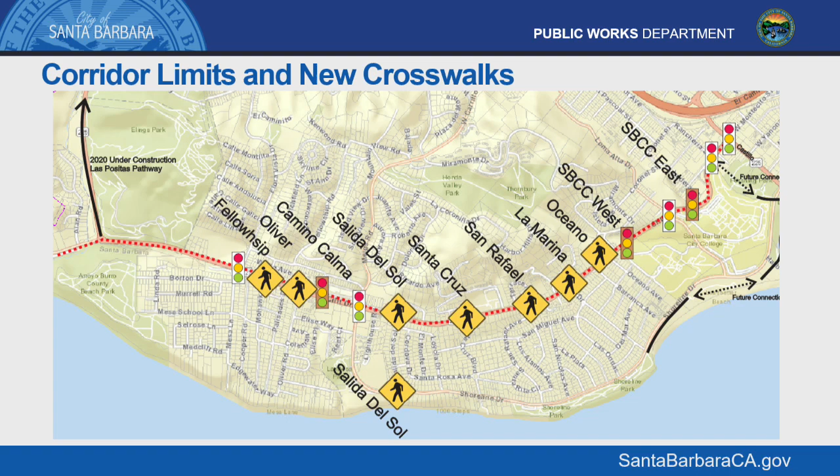We're planning, based on feedback from the neighborhood, for 7 new crosswalks and 3 new traffic signals on Cliff Drive, so there'll be a total of 10 better crossing locations than there are today. And we also heard that on Shoreline Drive at Salida del Sol, this is a location that the community would like a better crosswalk to get across the street. There's an entrance to the back of Washington School right up Salida del Sol from that location, and a better crosswalk at that location would provide better access between the neighborhood and La Mesa Park.

So some of the technical details that we've run into. The roundabouts are not feasible, and I'll show you some pictures and explain why. But this is kind of one of the first opportunities that we've had to say this in public, just that roundabouts are not feasible at the intersections we were studying. Therefore, we're concentrating on traffic signals at those intersections moving forward.

Two-way bike path that was strongly supported by the community. It does have some safety challenges that we're going to have to be very mindful of in the design. There's going to be some medians needed on Cliff Drive between Meigs and Camino Calma, and I'll talk more about that in the presentation. And as well, we're looking at raised crosswalks across the stop sign controlled crossings, and I'll show you why as well.

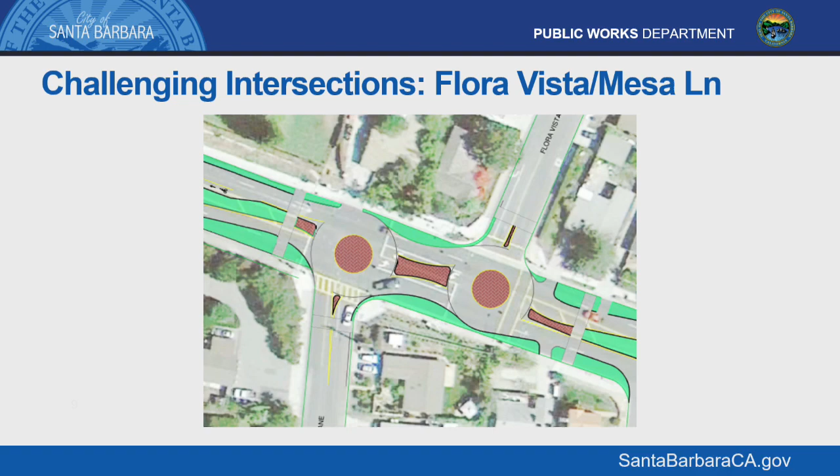But the drawback with going down to one lane with the way this intersection is configured is we're going to end up with 700-foot-long queues during the PM peak. And that's really a tough pill to swallow, and we don't think at the end of the day that that's going to be very well received by the community. So we are looking at maintaining the existing lane configuration going through this intersection. The consultant did sketch together a couple mini roundabouts configuration, but realistically this would probably be quite confusing for the public and wouldn't operate very well. So we quickly moved on from this idea.

Another challenging intersection is the driveway at Santa Barbara City College, the West Campus and Cliff Drive. Again, another intersection that we asked the traffic engineering consultant to study for a roundabout. There's basically two options, a roundabout or a traffic signal to improve operations at the intersection. We challenged the consultant to really reduce the footprint of the roundabout as much as possible so that it could fit. And they did that. Apologize for the graphic. The way they did this is they just laid tissue paper over top of an aerial and just began sketching.

But even with this reduced footprint roundabout, what we run into is, this is just the roadway edge, this doesn't even include the sidewalks, it starts to extend over into the southeast quadrant, and that's a creek habitat area, and the drop-off from the intersection is quite steep through there. So realistically, this just isn't feasible because of the topography in the area.

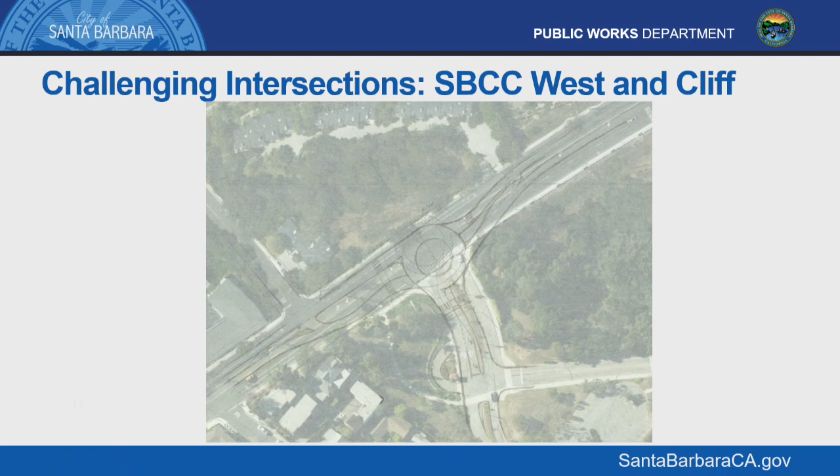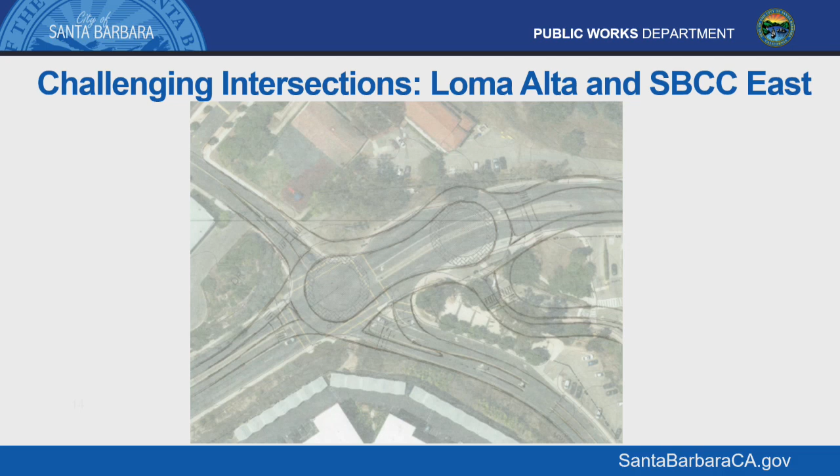So given the likely expense with an intersection like this and the limited benefits, we quickly discarded this as well. So all of the locations now, we're focusing on traffic signals instead of roundabouts. So based on all the public feedback and the results of the studies that were done for the roundabouts, we put some sketches together that was our best effort to reflect what the community had told us.

And last Thursday, we had a meeting at Monroe Elementary. We pasted all of the sheets together from one end of the multipurpose room to the other, and we just had people go around and look at it and give us their comments. We had some really great feedback. We had a really good turnout. Generally, there was a lot of support for the project. I'm going to walk you through the sections of the corridor and just share with you what we heard.

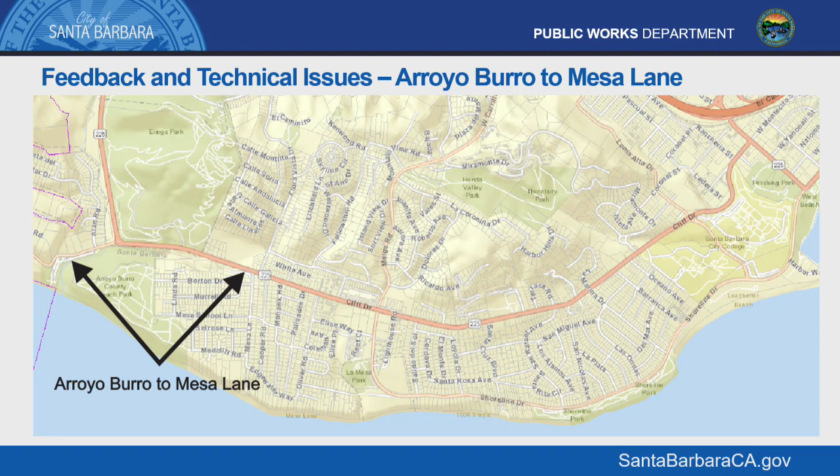I'm going to start at the western end between Arroyo Burro County Park, Hendry's Beach, to Mesa Lane. So this is probably the most straightforward section of the project. The roundabout, gosh, my cursor is not working very well. We're envisioning the path will run along the south side of Cliff Drive, past the roundabout. The roundabout was built to accommodate this. We were thinking ahead to this in the future.

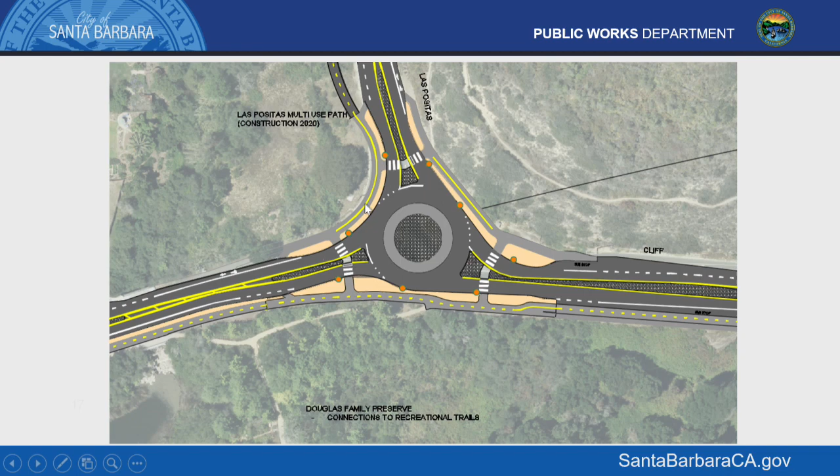This will be a location where the path that goes up Las Positas, shown here at the top of the screen, will tie into the path. So pedestrians and cyclists will just use the crosswalks going around the roundabout to get from one pathway to the other.

Starting to go up the hill, this is where the Elings Park entrance is off of Cliff Drive. This is a location we did get some feedback. People are wondering, how would I get from the path to the Elings Park entrance? We really don't have a good answer yet. It is an awkward place to cross the road. The road's curving, it's downhill, so speeds are high. We do expect speeds will come down somewhat once we go down to one lane in this section.

We are planning both a bike path and on-street bike lanes. The bike lanes will double as a shoulder, an important shoulder for safety and maneuverability for traffic as well. But we don't expect that the higher speed cyclists are going to want to use the bike path and mix with the slower speed users. So especially going up and down the hill here, providing them with a shoulder area that they can use of their own will be important.

We did get a question on whether or not parking could be added to this section of Cliff Drive. We did get some feedback that some of the neighbors in the Allen Road neighborhood would like some parking removed in that neighborhood and moved on to Cliff Drive instead as a way to maintain coastal access. Upon looking closer at it, there just doesn't appear to be enough room here, and there's probably some downsides to having parking on Cliff Drive as well.

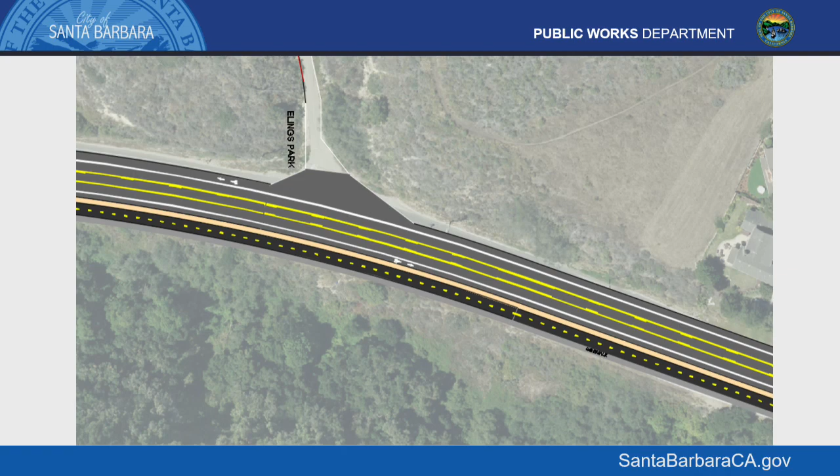So just summarizing this segment, we got feedback that we should add crosswalk flashers at Alan Road. Very reasonable request, and we're going to incorporate that into the plan. I brought up the parking on Cliff east of the roundabout.

There were some questions about whether or not we should have trees and that median separation between the bike path and Cliff Drive. That's something that once we move into the design phase and we have a landscape architect on board and the project is being reviewed by the Architectural Board of Review, that'll get sorted out. And people are concerned about traffic speeds. And that's a common theme throughout the corridor, traffic speeds.

Mesa Lane to Mohawk, so this is that intersection at Mesa Lane and Flora Vista. And as I mentioned, the challenge with going down to one lane through this intersection is going to be queuing, and we expect 700-foot-long queues will happen during the PM peak if we go down to one lane. The trade-off is that we are going to lose a few parking spaces by maintaining two lanes in between Cooper and Mohawk, which is in this area in the bottom right-hand side of the screen.

We did get some comments from the public that they would prefer to see those parking spaces maintained, and that would mean going down to one lane, and the trade-off would be the really long queues. So that's something we're wrestling with right now. It would be our recommendation to go with this type of traffic configuration, but that's a detail that can be worked out during design as to whether or not we maintain parking or go down to one lane, but it is a pretty significant sacrifice in capacity at the intersection.

What we heard about this intersection, that it's confusing, so there are some things that we can do to make it more obvious. There are some things that we can do to make it safer as well, and we will incorporate that into the project. Talked about the loss of parking and how some residents would prefer us go down to one lane in each direction. And the center turn lane that would be incorporated into the project was strongly supported.

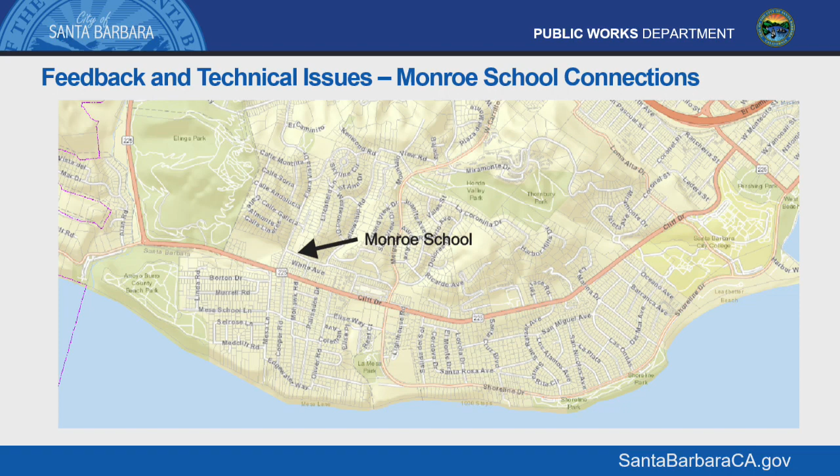We did have some options for connections to Monroe School. At the public meeting that we had in the summer that we attended at the Mesa, there were some questions about, well, how are we going to get from Monroe School to the path? And so we took a closer look at that. Apologize for the scale here, but this is Flora Vista. This is the main entrance to Monroe School.

So our idea is to widen the sidewalk along the east side of Monroe. Currently, Flora Vista is about 40 feet wide. It's about 4 feet wider than a standard city street, so we could pretty easily widen that sidewalk from 5 to 9 feet and still have a standard width city street. We could even plant some trees in the parking aisle to provide some separation between the sidewalk and moving traffic, and that was pretty well supported.

Also supported was some curb extensions at the Red Rose and Flora Vista intersection. We heard a lot of comments from people that drivers come flying down the hill on Flora Vista and the stop sign compliance isn't very good, so that would help. And then the other thing that we are proposing is to do some sidewalk infill on Red Rose between Fellowship and almost all the way to Flora Vista. There's only about 100 feet of sidewalk and then it just ends.

These homes, they all face into the cul-de-sac, and this curb that's along the south side of Red Rose, once you're beyond that curb, it just drops down into people's backyards pretty rapidly. So we would actually have to build the sidewalk within the existing roadway footprint. But again, this is a 40-foot wide road. We could build a narrow 5-foot wide sidewalk, maintain parking on both sides, which we heard overflow parking for the school, especially during school events, is important here. This got good feedback too, but maintaining parking was something important to folks in this section.

Between Mohawk and Lighthouse, this is getting to the section near the shopping center. This is at Oliver, and this is a standard intersection configuration that we're planning. Due to some of the safety issues associated with a two-way bike path, we are recommending that if the project moves forward, that we include raised crosswalks at the intersections. And that's going to be important to improve visibility of cyclists and pedestrians, but also to slow drivers down as they're going across the path.

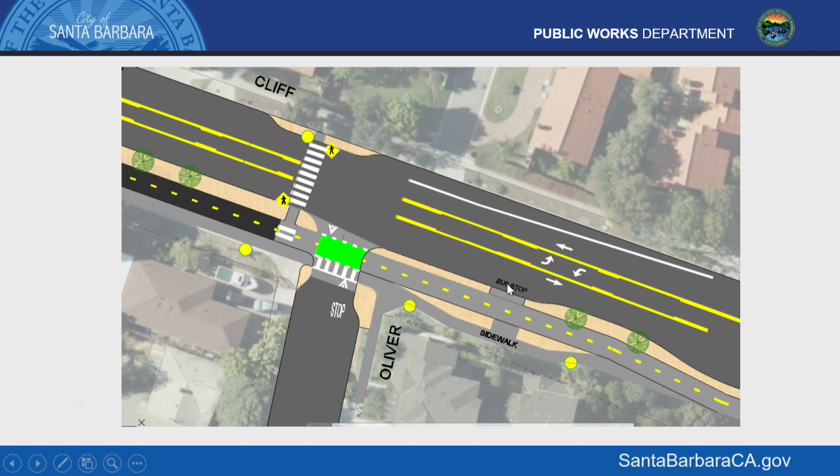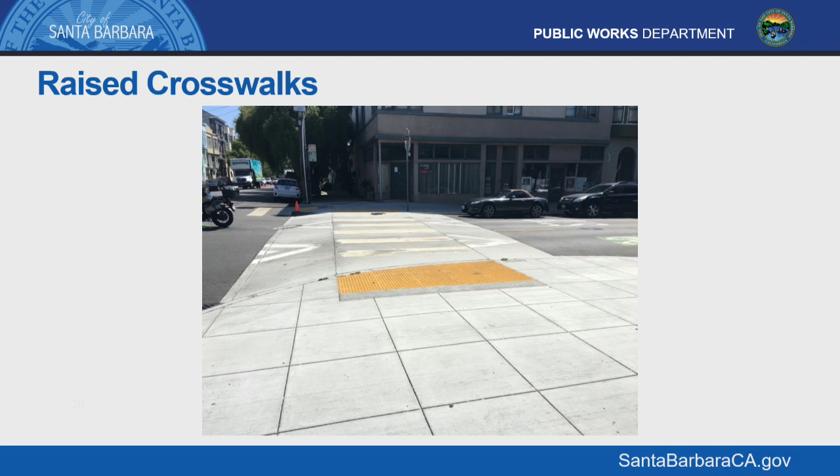This shows a new crosswalk at Oliver, which was strongly supported. And as well, this shows a bus pocket. And this is pretty typical of our concept designs along the corridor, having crosswalks near bus stops. This is an example of a raised crosswalk. This is a pedestrian-only raised crosswalk. This is an example likely of what our project would look like. So this shows a slight raise as the bike path goes through the intersection. Of course, it's got the green highlights to improve visibility.

This section here in front of the shopping center, we got the most feedback for this section, and this is probably the most complicated section within the project. This section between Camino Calma, which is the intersection on the left-hand side of the screen, and Meigs, which is the intersection on the right-hand side of the screen, currently has the highest concentration of collisions in the corridor. So we've already got safety issues going on in this section, and we need to be very sensitive about introducing a bike path, because we could be introducing some new safety problems.

So we need to take steps to correct the existing safety problems and protect users that are going to be on the bike path. In looking at the collision pattern, a lot of the collisions are involving drivers pulling out of private driveways trying to turn left. And just thinking about introducing a bike path into the mix and potential users of that bike path, eliminating those left turns from the private drives is really something that we need to do to protect users of the path and to get rid of that existing collision pattern, just to make the whole area safer. We do that by building medians down the middle of this section.

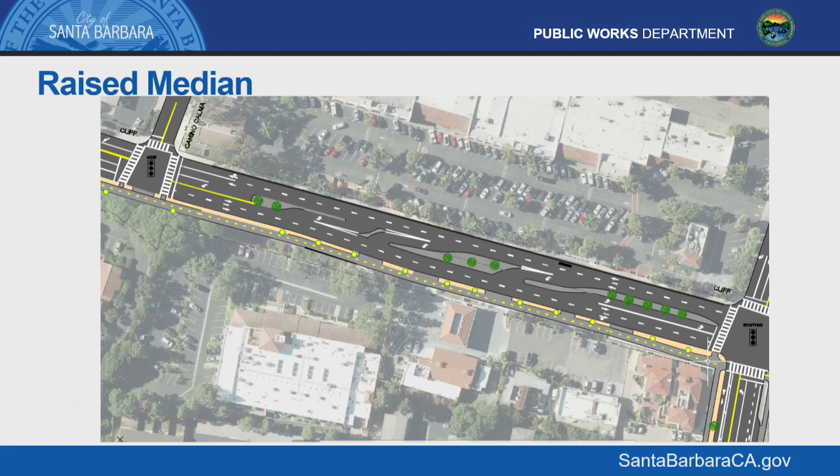There would be opportunities to turn left into businesses, but leaving businesses, they would have to go down to the next intersection. And for example, with the shopping center, they could exit onto Camino Calma and turn left at a new traffic signal. Or if they're along the south side, they could turn right and make a U-turn at the intersection. So that is a pretty big change. We did get a lot of comments and concerns about that, but it's really an essential feature to this project. And if we can't make this section safe, we don't have a project. We can't move forward. So we hear the concerns, and that's the trade-off, is in order to move forward with this project, we need to do something about the safety issues here.

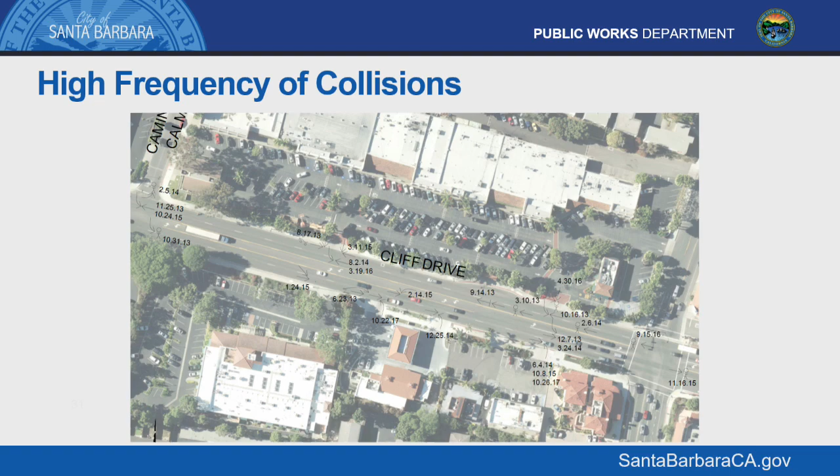Oh, this didn't show up very well. This is an aerial diagram that shows the existing collisions that are happening over a recent 5-year period out there. And what this is trying to illustrate is all of the collisions, and many of them are involving people trying to turn left from the private driveways. And it is a busy area, so it stands to reason that when you're trying to turn left into a busy street, that there are going to be collisions. And in fact, that is showing up.

So just summarizing again what we heard, most comments were in this section, concerns about the medians. We did get just a general comment that there needs to be more bike parking in the area with the shopping center, and certainly if we were to build a bike path, which we would expect to be very successful, the need for bike parking would increase. And there was support for a new traffic signal at Camino Calma at the western end of the shopping center.

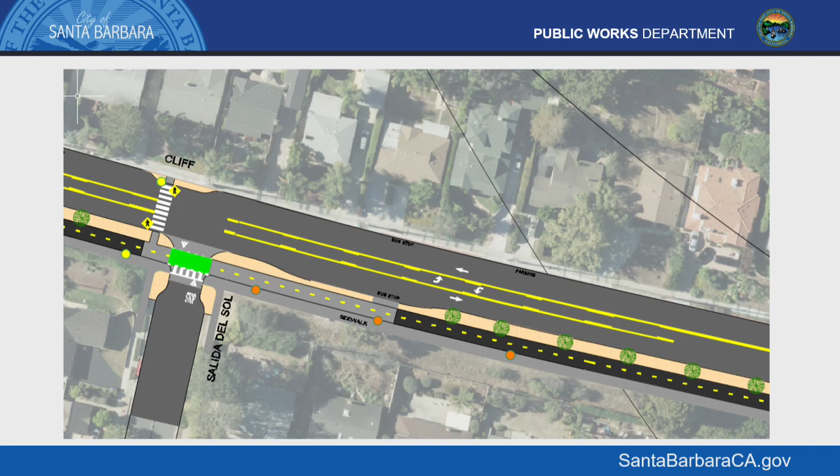What we don't want to have happen is somebody trying to turn left from one of the side streets, waiting, and somebody passing them on the right. And we all do it, rolling through stop signs. We try not to. But if somebody's trying to turn left and somebody were to roll through a stop sign as a pathway user, going through the intersection, that would be a really bad mix. So again, this is another essential feature of the project for safety, but there were comments about that.

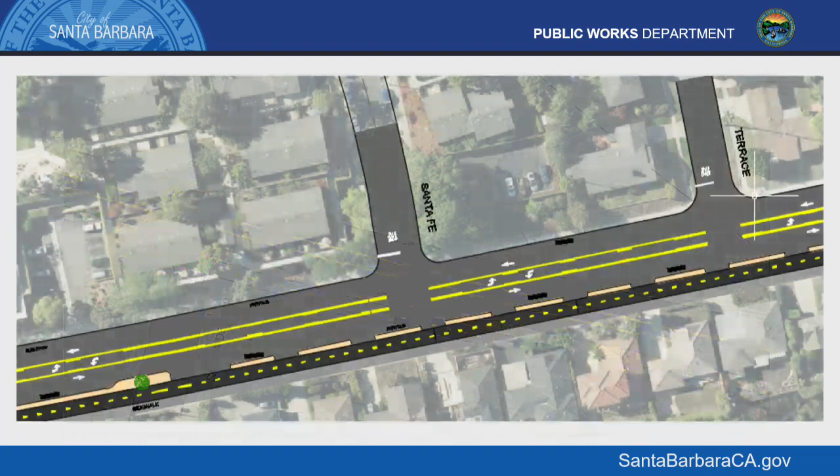Oceano to the Santa Barbara City College East Campus. So this is Oceano here. A new crosswalk proposed, was very well supported. The pathway along this section would be up at sidewalk level, so it would be combined with the sidewalk, be really generously wide. We could probably have about a 15 to 16 foot wide pathway through this section. Lighting is probably extra important in this section, given students and evening classes, just to make them feel comfortable. And a new traffic signal at the City College East Campus driveway.

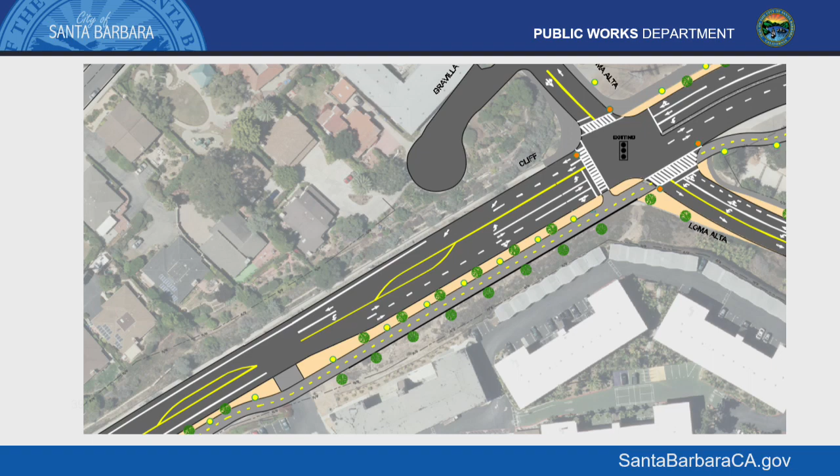This is the Loma Alta intersection, the existing traffic signal. This section is where we have to open back up to 2 lanes in each direction just for traffic capacity reasons. Because we need to maintain most of the width on Cliff Drive, we would have to get into the berm that's along the south side of the road. But the city does have plenty of right-of-way along there. We could build a really wide parkway. We could have trees straddling the pathway. Again, it could be wide, 14 feet. So this could be a really great place to walk and bike along.

And this is, again, Loma Alta and the City College East Campus driveway where there would be a new traffic signal. Some changes here. One of the things that we heard from City College is the existing bus stop. There's a bus pullout westbound Cliff Drive just before the intersection. When students get off the bus, they come across the intersection. There's quite a mass of them. And what they do is they enter the college campus and they walk down the driveway in front of the admin building. City College staff, they're quite concerned about the safety of their students.

It is a busy driveway, so there's quite a mix of deliveries, access to one of their main parking areas, and introducing pedestrians into that area. They do have some concerns. They would prefer students to be over here on the right-hand side of the screen, which guides pedestrians more into the main entrances where the classrooms are. So the concept would be to actually eliminate the crosswalk on this side, move the bus stop closer to that new traffic signal at the East Campus driveway, and have the crosswalk here.

They would cross and they would enter the college campus closer to where City College is trying to get people to walk. In that space where the bus pocket was, we could fill it in, landscape it, trees. We could widen the sidewalk for a few hundred feet up to McKinley School, which would create a better walking environment from the Lower West neighborhood to McKinley School.

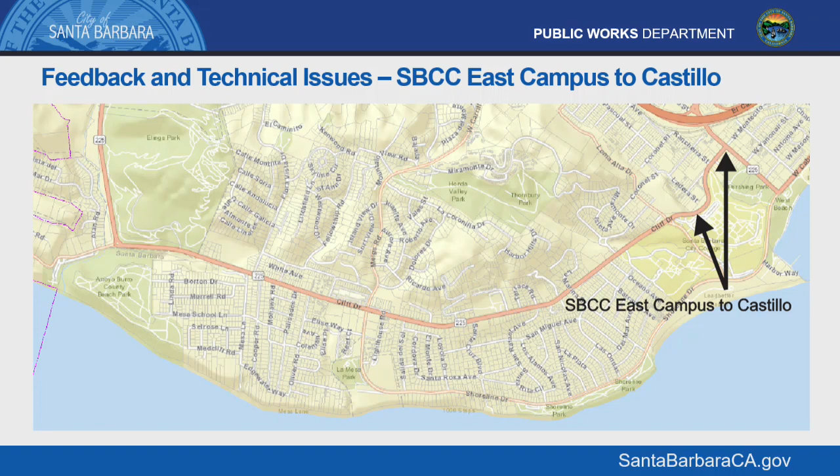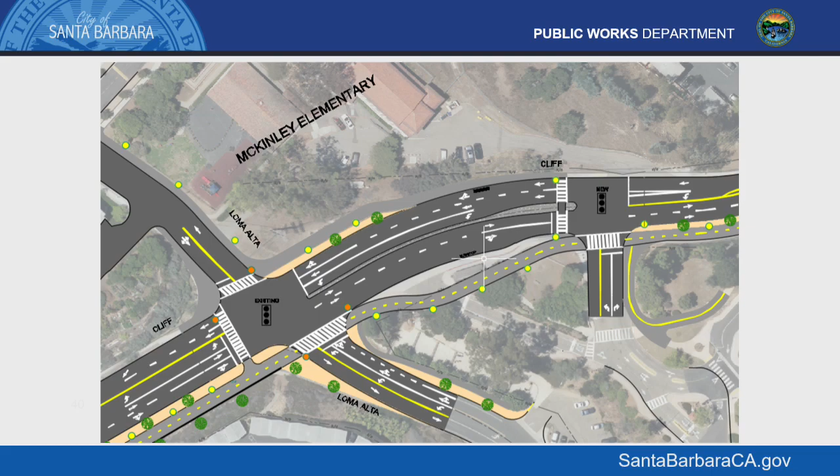Chair, could I ask a question? Yes. On those lights, that sort of double at Loma Alta and at the entrance, correct me if I'm wrong, but those will be together, they'll cycle together, is that right? Committee Member Lackerby, yes.

Given the really tight spacing of these two intersections, there'd have to be really good coordination between them. So if a driver on Cliff Drive drives through the first intersection, we'd want them to clear the second intersection. We would run into red light running problems if we didn't provide for that. So that'll be an essential feature, good coordination between those two traffic signals.

And finally, the final section, the East Campus driveway to Castillo Street. So this is what we call the viaduct section. Along the north side of Cliff Drive right here, that's the giant retaining wall, and the Lower West neighborhood sits at a lower elevation. We would have to go down to one lane going uphill. We would maintain 2 lanes going downhill. That would be important for capacity.

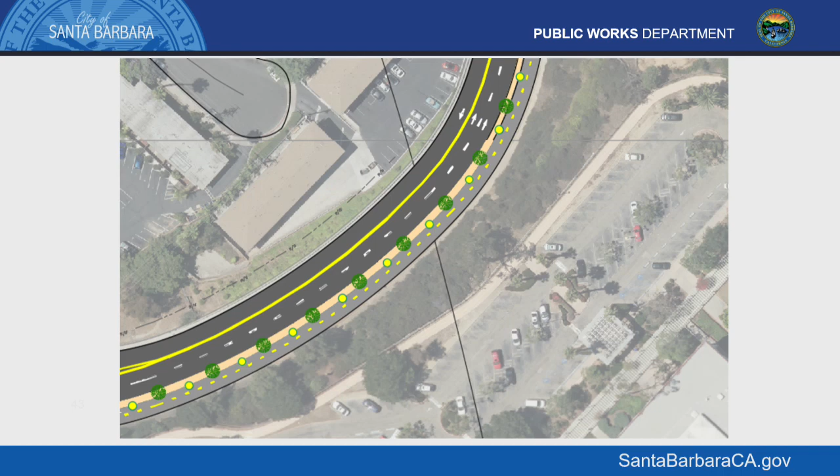This eastbound movement going towards Castillo Street gets quite busy during the PM peak, and just for stacking reasons alone, we would need to maintain the 2 lanes. But by going down to 1 lane uphill, that would provide us with enough room to widen the pathway to, I think, about 14 feet and provide a parkway for some separation. It seems like lighting would be a good feature in this section as well.

This is the Rancheria intersection, so this would provide a connection point from the pathway to the new bike lanes that were recently installed on Rancheria. And this is the section approaching Castillo Street. We would have to maintain the existing number of traffic lanes in this area just due to capacity reasons. But all the lanes that are out there right now are quite wide. They were built to Caltrans standards many years ago.

We think we can gain about 8 feet of street width, so we could widen the sidewalk and provide a small parkway in this area by adding 8 feet to the existing sidewalk. The path would end at Castillo Street. At this location, we envision short-term there being a left turn staging bike box so that cyclists could go up Castillo Street. A little bit longer term, we do have a funded project through the Measure A program to study Castillo Street and improve the connection between Haley through this area. So we do anticipate future improvements will tie into this.

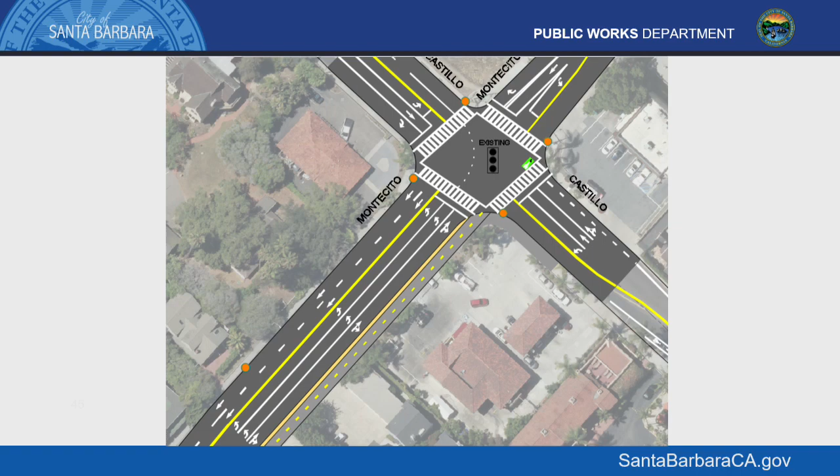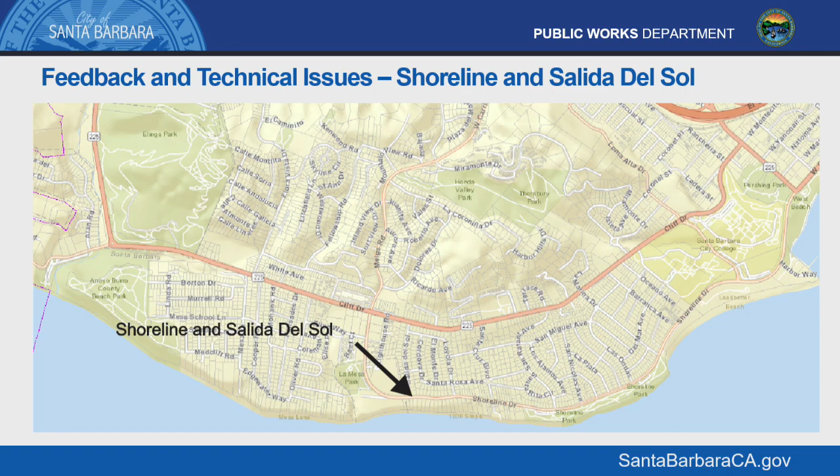So what we heard for this section, there's concern about the Castillo connections. And obviously, we see this as a short-term solution, and long-term, we would improve the connections up and down Castillo Street. And there was good support for a connection into the Lower West neighborhood. Not on the Cliff Drive corridor, but again, I mentioned there's a neighborhood desire for a better crosswalk at Shoreline and Salida del Sol. So we showed this to the neighborhood at the meeting last Thursday, and there was good support for that crosswalk as well.

So that completes my presentation. I'm just going to walk you through where we go from here. So we're in fall 2019. There's minor tweaks that we need to do to the design based on the feedback that we received. There's going to be continuing public outreach. We've received a lot of emails and feedback even since the meeting last week, so we're going to be continuing to communicate with residents. We have some coordination to do with MTD, City College, and SB Unified School District as well, just to make sure that those features are dialed in heading into the grant application.

By February, we expect to go to City Council so that they give their approval for us moving forward with the grant application. Spring, we're going to be preparing that grant application, and by December next year, we'll know the results. And we expect success so that by summer of 2021, we'll be moving into design, and it'll probably take about 4 years to design and deliver. So with that, I'd be happy to answer any questions.

I apologize, I moved pretty quick. It's a long corridor, and there is a lot of stuff along it. So even at the public meeting last week, it was a lot for people to take in, and we're continuing to get emails asking questions: "Hey, I thought of this." But overall, the response has been really great.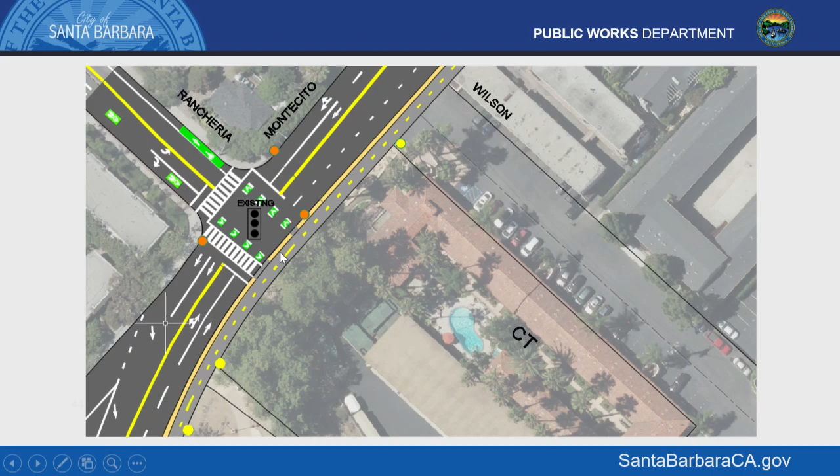This would widen the sidewalk area to about 13 feet. So it would be quite generous in width to be a lot more comfortable. You know, if you're waiting at the intersection trying to get to Rancheria Street, or if you're on Rancheria Street coming down towards City College, there'd be a really generous area accepting pedestrians or cyclists.

And just immediately west of this intersection, there is a landing area at the bottom of the hill from City College, and it's quite a well used bike parking area. It's also a space where the path takes off up the hill, so it seems like there's good opportunity there for future connections, both alongside Pershing Park and up into the campus area. And this project certainly would probably do a curb cut at the very least. Down in this area? Yeah, I would expect it all to be quite flush and permeable between. Yep.

I have more comments, but this is not going to be a related comment. Please continue, Mr. France. So first off, if I could just be sentimental for a moment. I remember the Mesa neighborhood talking about this concept like 15 years ago, and people were thinking about using the current median and just putting a multi-use path down the median. It was all very like, you know, we could do something, but the technical element was totally lacking, right? Because you couldn't just run a Class 1 bike path down the middle of a 4-lane roadway. But the vision from the community was there.

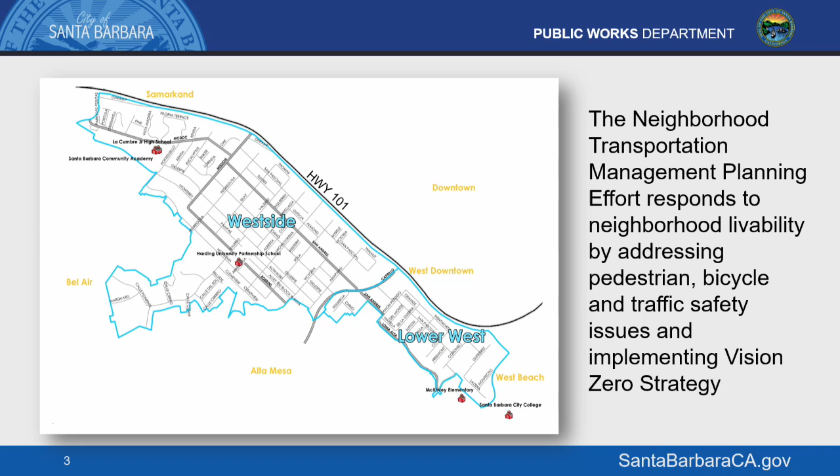So where we are in the planning effort: to get to the physical plan itself, we first began with the neighborhood with a listening workshop held in April of this year. We also followed up with a supplemental survey for residents to add comments since the workshop, or for those that couldn't attend, as well as people contacting me, mostly via email. And as a separate and parallel process, we were doing the Vision Zero traffic safety analysis.

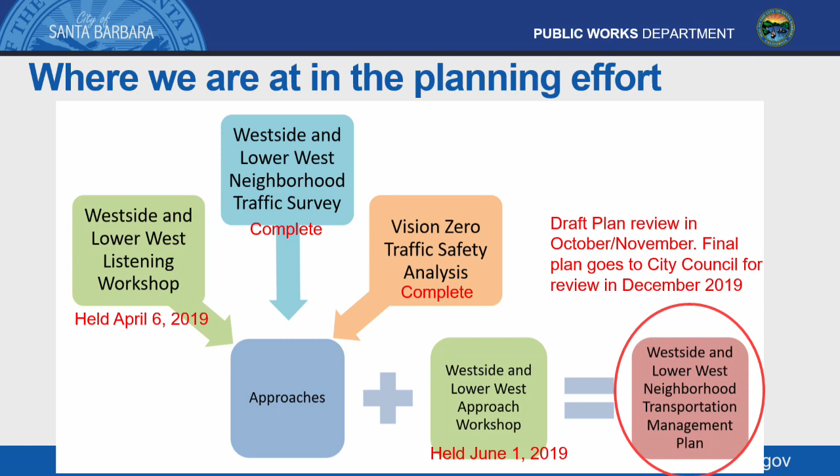All of those three components fed into the approaches, and that's when we returned to the community in June to say, okay, do these approaches address your concerns, in addition to what we were seeing in the collision patterns? We received comments again at that approach workshop, and then over the summertime staff began to synthesize everything into the plan that you have before you tonight.

I have recapped this in prior meetings, but I did want to again touch base on the neighborhood input. So this is just some images from the workshop that was held in April. These are the themes that we discussed with the residents and sought feedback on: driving, walking, bicycling, neighborhood lighting, transit, and parking. The image to the right is just an example of one exhibit that we used as a base map for residents to provide feedback on.

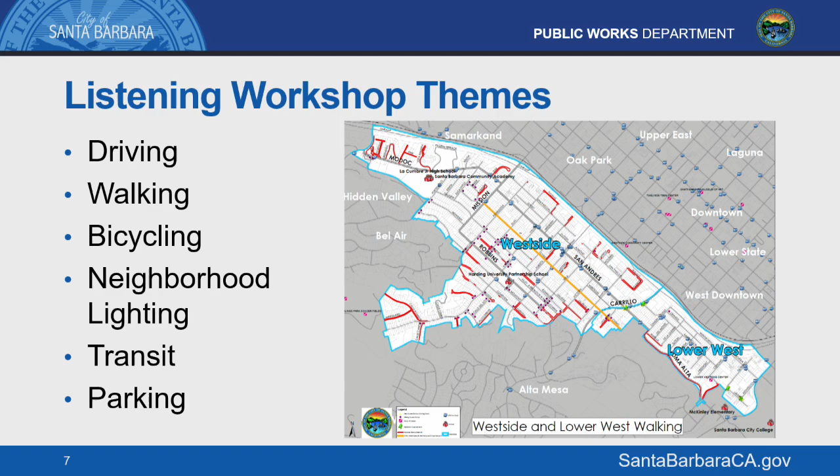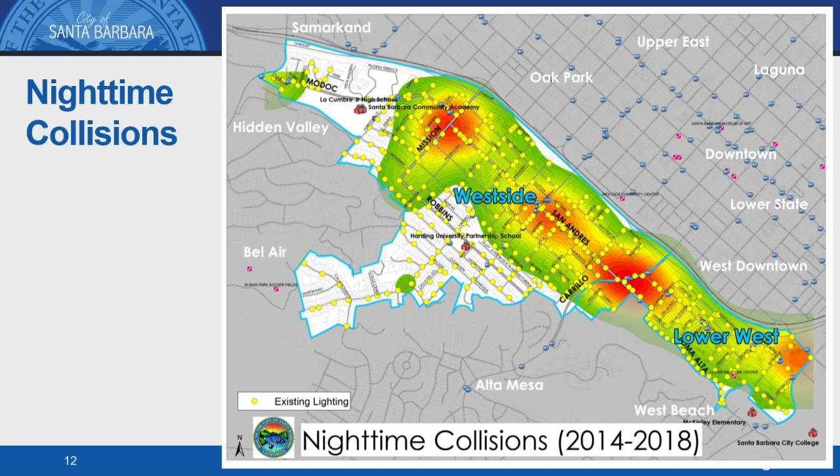Mission was another area with collisions. Compared to daytime or overall, there wasn't a detectable pattern other than those particular collisions being DUI related. And then we compared our Vision Zero traffic safety analysis heat map and overlaid what we were hearing from the community to see if there was any overlap between the data and what we were hearing. I would say it was pretty well correlated to what we were seeing in the collision data.

So again, with what we've heard, the Vision Zero analysis becomes the meat of the plan. We have a Vision Zero focus, and I'll go into a little more detail on what that means, and what the short-term and long-term improvements are, because although we have a stop point for listening to the community right now, we are always working in community, so there are already things we're addressing that I wanted to document in the plan narrative as well. When I go over the improvements, I'll discuss what is happening in the next 1 to 2 years, other longer-term improvements that do not have capital funding, and what plan implementation would look like to try to get funding for projects we see emerging.

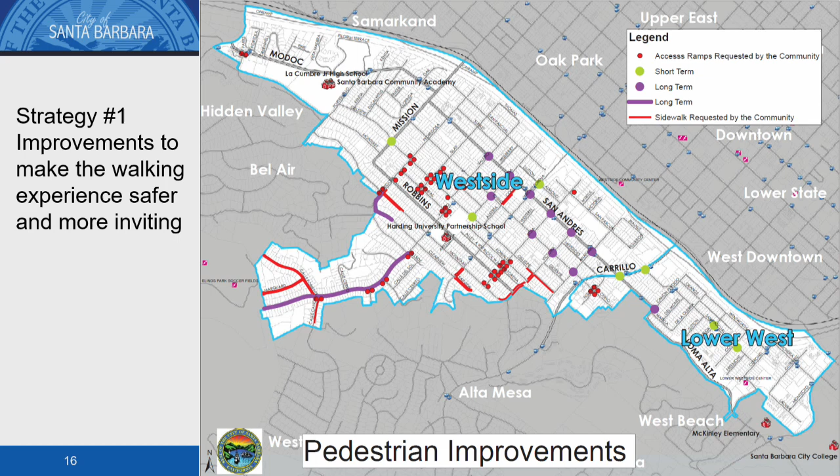What we heard most about for sidewalk infill, Valerio received a lot of comments at the workshops. There's sidewalk in some locations, others not, but we keep hearing over and over a need to infill sidewalk along that entire corridor all the way to Elings Park. Because there is the draw of Elings Park there, to have a separated facility for pedestrians. And then, of course, the other direction, if you live on that street and you go to Harding Elementary, again, to have sidewalks along your route to school is very important.

Then there's others indicated in red, which would be accessibility improvements such as access ramps and some other pieces of sidewalk infill that we wanted to also reflect in the plan. Moving on to the second strategy is neighborhood lighting improvements to enhance the walking, biking, and driving experience.

As I mentioned, with the improvements at San Andres and Carrillo, there is also a very large corridor lighting project for street lighting. It would start all the way at Bath Street, go under the freeway, which we've heard about not only this time for outreach, but for many years, the lack of street lighting in that intersection and as you approach the freeway. And then it would go all the way uphill to the Alta Mesa area. So a very big improvement coming soon.

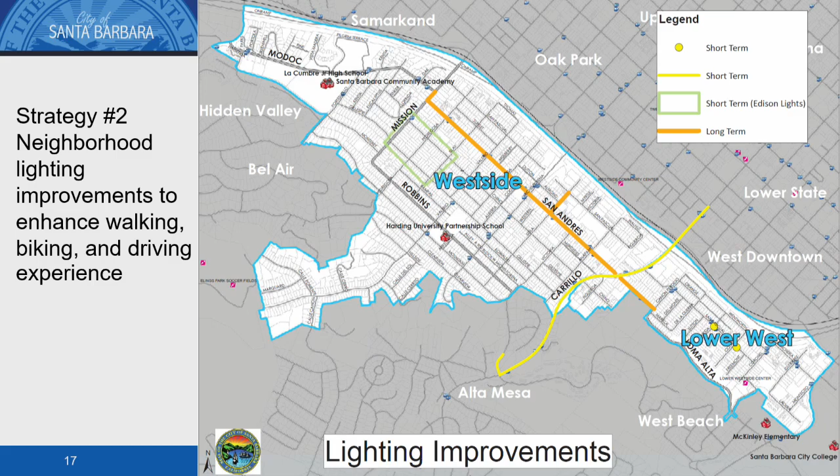And then we also heard this was sort of, I don't have the Edison lighting map. Most of the lights in this neighborhood are Edison lights. There was lighting recently upgraded. All the Edison lights went from high pressure sodium to LED lighting, which was a big improvement. But then there's still gaps within the existing street lighting structure. Highlighted in this sort of green box area is between Mission and Islay streets and Gillespie and Chino streets. And so it'd be working with Edison, where there's poles with no lighting, to erect a light or a new Edison pole as well.

So did we get everything for lighting requests for the neighborhood reflected on here? Not everything. These were sort of the main takeaway points, but we tried to reflect in the plan that there's still going to be sprinkles of lighting needs that we have. And as we receive funding, hopefully to make improvements in this neighborhood, we're still continuing to look at some of the adjacent streets. For example, some of the areas for needed lighting center around near the Boys and Girls Club and Bohnett Park. So I do want to reiterate that it's not forgotten. And so narratively, I tried to make reference to that in the plan.

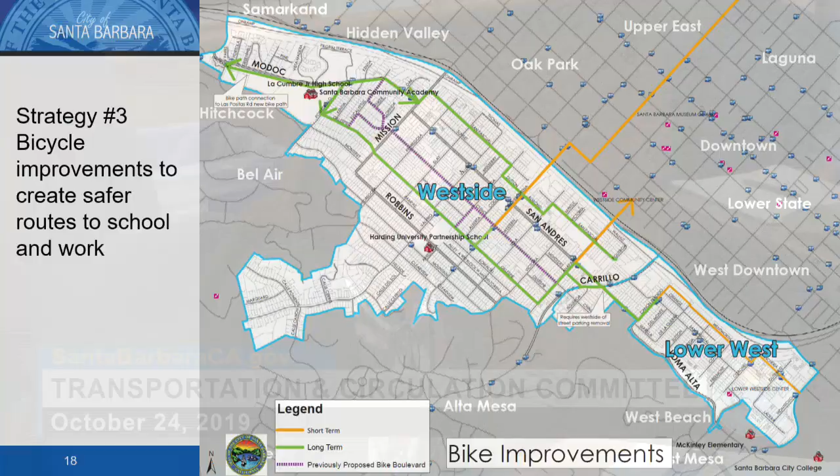So the last strategy is bicycle improvements to create safer routes to school and work. What we've heard already, because we had a pretty robust outreach as part of the bicycle master plan, and then continued to be affirmed with this outreach process as well, is to have a really good north-south connection along the west side and lower west neighborhoods to get to schools, get to the beach. And then we also heard that there needs to be a very strong connection leaving the west side, going to downtown and to subsequent neighborhoods like the east side.

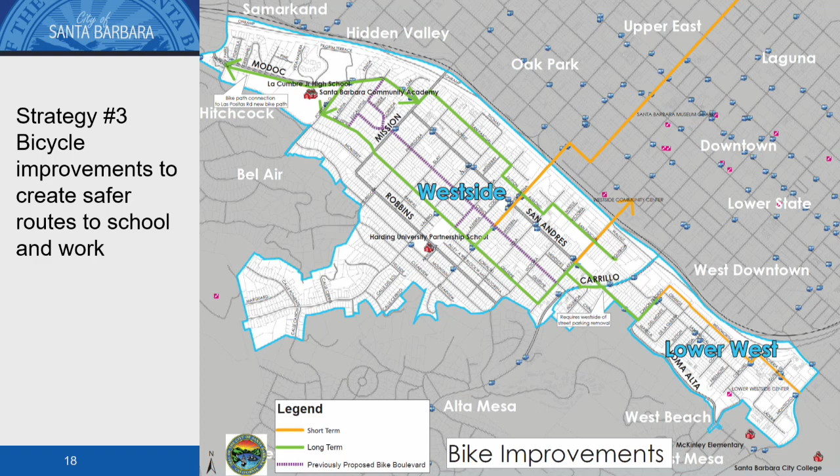What I wanted to touch on is we did receive an active transportation grant, and we are currently in the traffic analysis and concept design stage for that project. That would put a stronger connection to downtown via Micheltorena and Sola. But one of the things we had in the grant was to have a bicycle boulevard. It's kind of dotted here along Chino. But as we were going through the traffic analysis as part of that grant, this is what we were finding. And I'm going to take a quick pause point here.

So, again, we expect there still to be strong vehicular patterns coming from Carrillo onto Chino and then Micheltorena. So if we're trying to design a bicycle boulevard, which, I don't think I defined it yet, is just a low volume street where cars and cyclists can coexist. And with the amount of traffic that we're seeing now and that's anticipated, there would have to be a lot of traffic diversion in the neighborhood if we were to keep Chino as the bicycle boulevard.

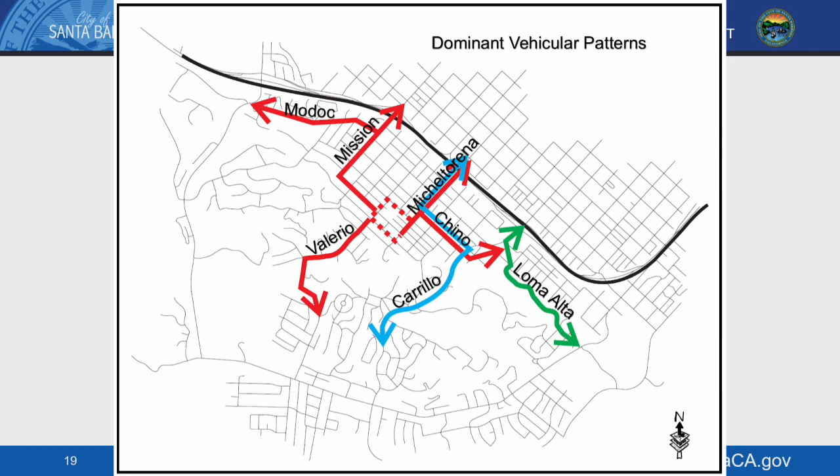The last item is Modoc along La Cumbre Junior High and Santa Barbara Community Academy. So if I were to go back, another dominant vehicle pattern is along Modoc. And what we're hearing from the residents is this continues to be a really busy street, and it feels higher stress for walking and biking along this corridor. So what we're exploring, what we received a Measure A grant for, is to evaluate a concept of a multi-use path along this stretch of road along Modoc between Las Positas and Mission.

And as Derek explained in his presentation too, we are going to be having soon constructed the multi-use path along a certain section of Modoc from Calle de los Amigos to the Las Positas intersection, and then again down to the beach. We're expecting more users on that roadway, and I think with the multi-use path on that section of Modoc, there will be a continued demand to get into the west side. And so again, we're looking at a multi-use path along that stretch, and then also to wrap around the junior high, and then that would lead you to Gillespie if you're going into the neighborhood as well.

So it's still in concept. We're hearing good things about it from the residents, but this is an area that we needed to survey, which we're in the process of doing, and we need to do a concept layout of what that looks like. There are a lot of mature trees along that stretch, and so we're just trying to see how much right-of-way we have to work with, and we're hoping to return to the community in January to discuss the concept further.

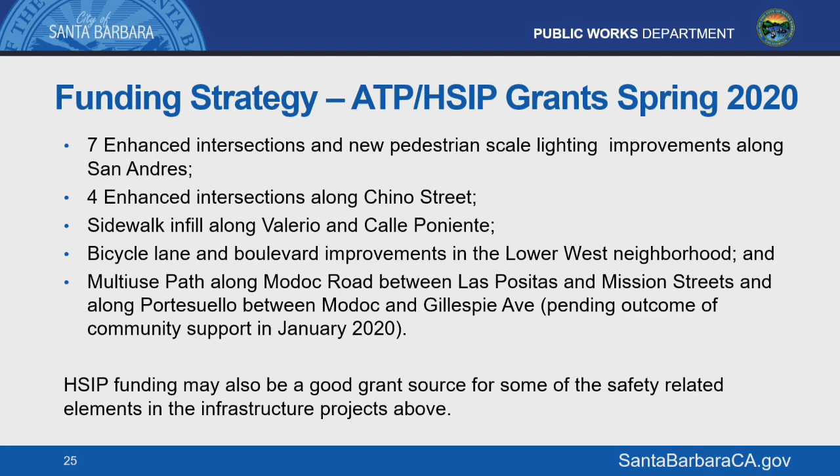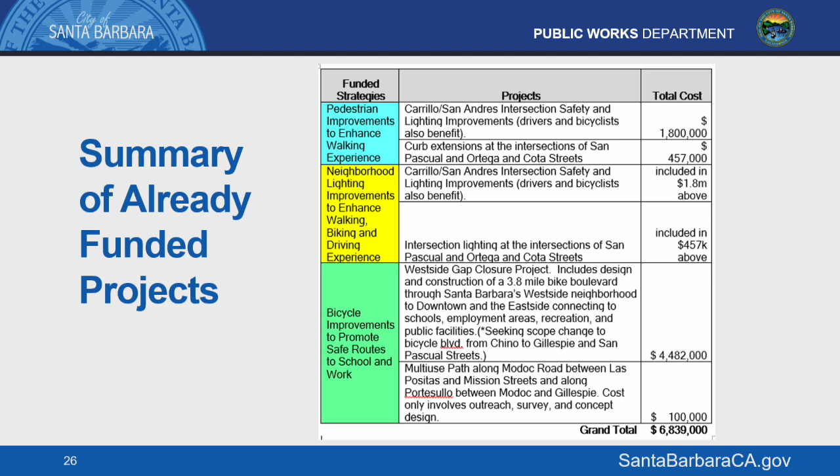And then the summary of already funded projects. So we have just under $7 million that is being invested in the lower west and west side neighborhoods now. And then, besides infrastructure-related items, there are things that shouldn't be ignored either, and that's what we documented as additional plan items. Some of these were just do it items, others are ongoing.

I'll highlight a couple. I talked to you about a pattern of pedestrian collisions at a traffic signal at Micheltorena and San Andres. As you've seen, traffic signals are one of the highest levels for crossing improvements, but there was an issue of left-turning vehicles for pedestrians. So one just do it item was we manipulated the signal to have an LPI, which is a leading pedestrian interval. All the vehicles are at a stop, but a pedestrian would have, I believe, a 4-second lead to establish their presence in the roadway, making them very visible for the left-turning vehicles to then improve their yielding.

Another thing, as I discussed, was curb extensions along San Andres. One of the just do it items, as an interim measure during our field reviews, was the intersection of San Andres and Victoria, which goes directly into Bohnett Park. On one leg it was really hard to see oncoming vehicles. We purposely go at times when school's going into session, or in this case had just gotten out, and visibility for a child making that same cross is even less than for an adult. So we quickly sent crews out to extend the red curb at that intersection, in hopes to improve it even more with curb extensions and pedestrian rapid flashing beacons in the future.